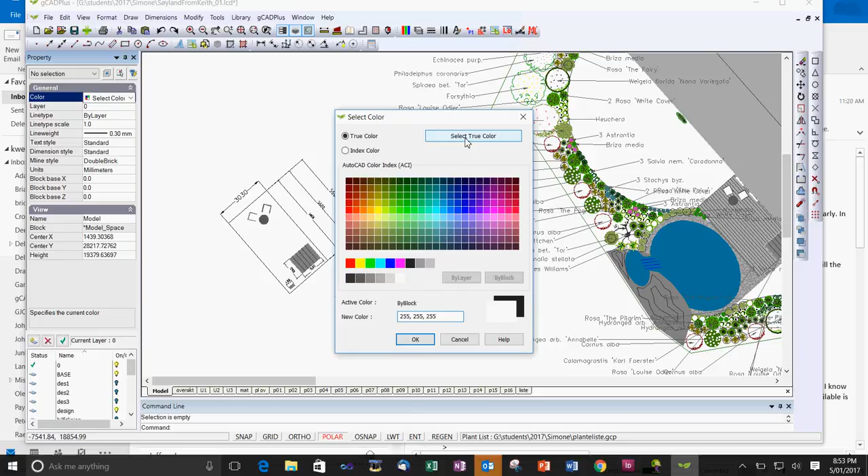Let's double click on the drop down and go into Select Colour, then True Colour. If we pick this dark black here, can you see it's red, green and blue of 0, 0, 0. If we change to, say, this orange, we get the red, green, blue numbers that define that particular orange colour.

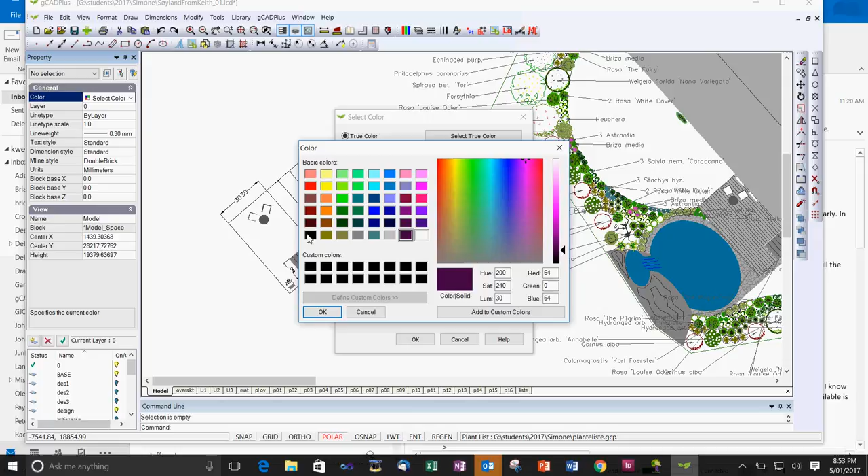Let's go back and pick True Colour and make it black again - 0, 0, 0 - OK and OK. And you see I'm drawing with that colour. So if I draw a line like so, and we pick that line, it says I am colour 0, 0, 0.

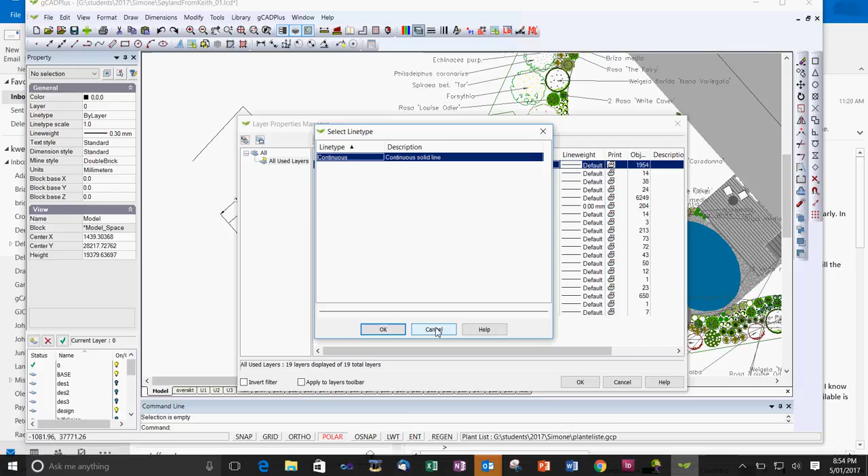We're also nominating that whatever we draw will be on layer 0, and the line type that line inherits is controlled by the line type of the layer. So if we come over here, we're on layer 0, and the line type is a continuous line, but we could add a line type file with dot dash patterns and all sorts of things.

The point I'm trying to make is to be aware of all these settings. Anything we're drawing will have a line weight of 0.3 of a millimetre. Let's turn line weight on, and you can see the line I've just drawn is thick.

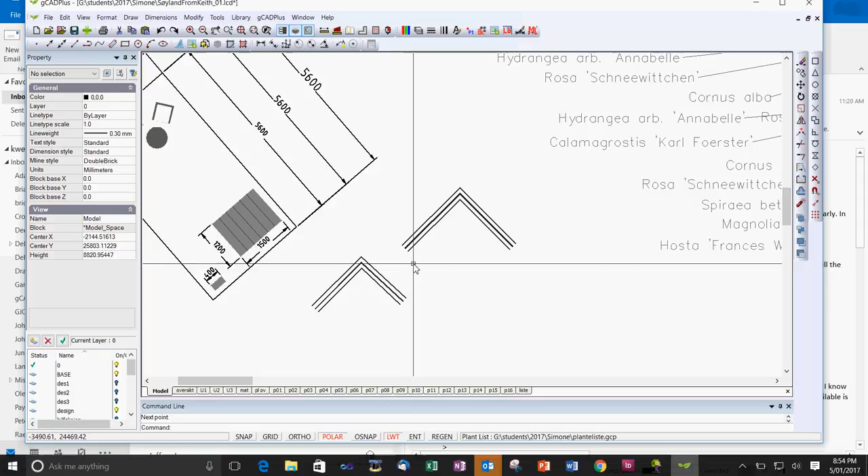The current dimension style is standard. My M-line style is double brick, so here I've used multi-line to draw. I've got polar on, so I can go 45 degrees and then 45 at this angle and hit enter. I could change the properties of that multi-line at will.

If I turn line weight off, you can see that we're drawing two bricks with a 10mm gap in between. That might not be the sort of double line you want to draw, but we are drawing with that as a default. We can come in here and say I'm just going to draw a standard line, and that setting will remain in the properties box.

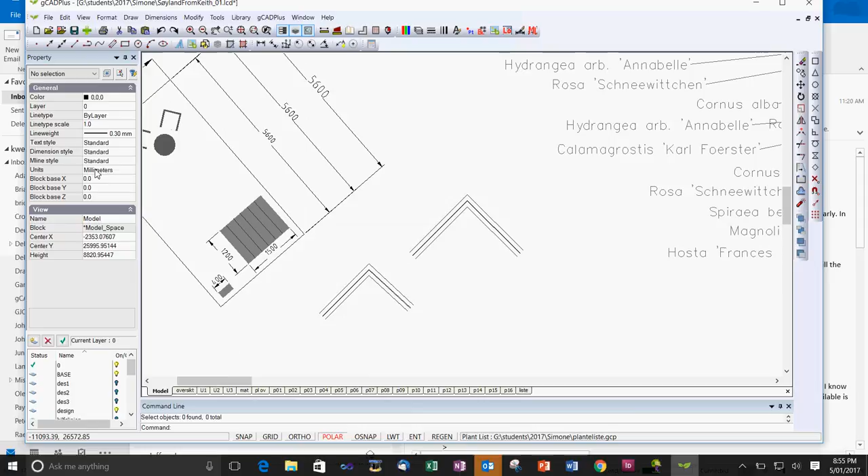Our units are millimetres, and the dimensioning style we're using is standard. If we come over here, which is just a copy of that decking area with its seating and raised table, if I wanted to dimension that table - let's pick this dimension here - that's an aligned dimension.

So if I say dimension aligned, I pick up the corner of the deck and then the other corner of the deck, and then I move out. I'm drawing that new aligned dimension with the standard dimension style.

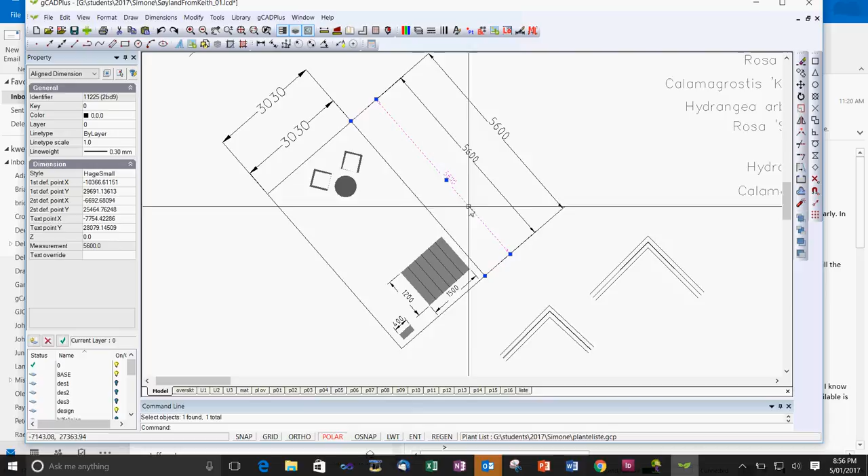What I've done over to the right is change the dimension style - let me pick this one, it's called HageSmall, the next one is HageMedium, and the next one is HageLarge. Can you see there's a difference between all of these? It's a subtle difference in arrowhead size, but a more major difference in the height of text.

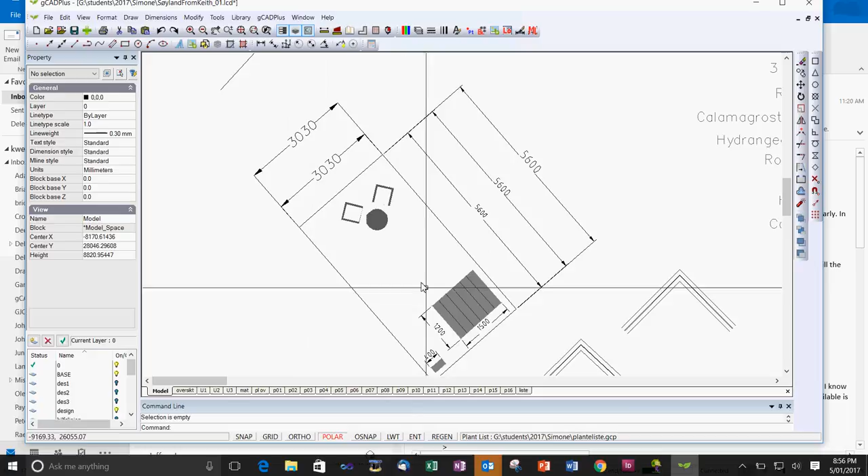So it becomes important when you're working in small areas such as this. If I pick this one and dimension it in the large dimension style, can you see that's very awkward? Much quicker to pick that one and change it back to HageSmall.

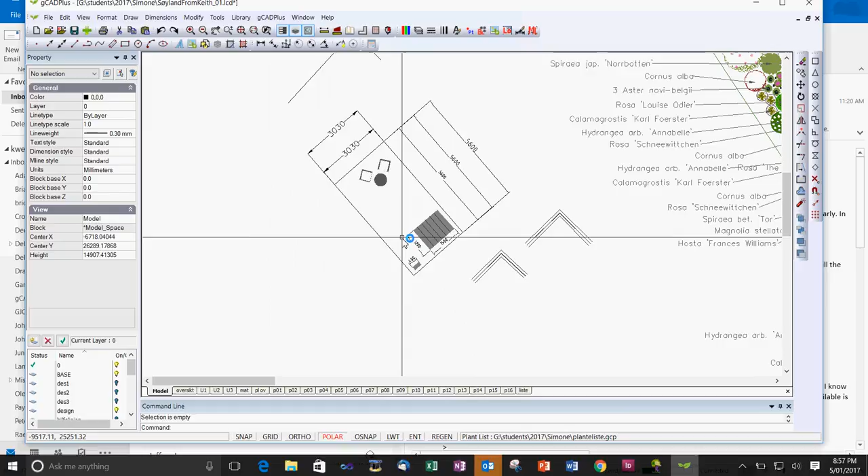So being aware of what you are doing, and that in this drawing there are several dimension styles - let's list them: large, medium and small. In each of these I'm changing the text height - 50 for that one, text height 200 for that one, and text height 150 for the other.

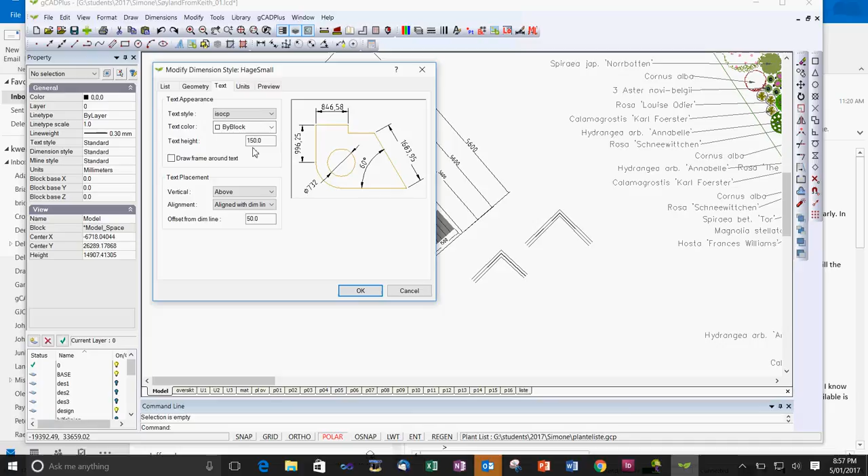So you can see I'm making changes in those dimension styles. It becomes very easy to switch dimension styles and apply them to different parts of the drawing. What I'm trying to emphasise here is the need to be aware of the current drawing properties.

My favoured way of working is to set colour by layer and line weight by layer, so I can control the appearance of entities in the drawing according to my layer settings, and that helps me deal with variation in paper and paper sizes in layout space.

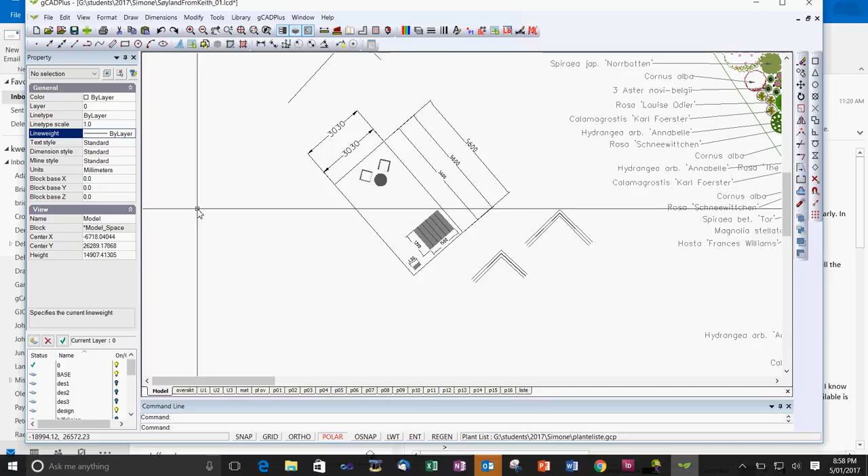Sometimes they might be A3, at other times A1, and I want to be able to vary things appropriately. The quickest way to do that is to change my paper size and then change my text styles or dimension styles according to the paper size I'm printing on. So I hope that emphasises the importance of the properties box.